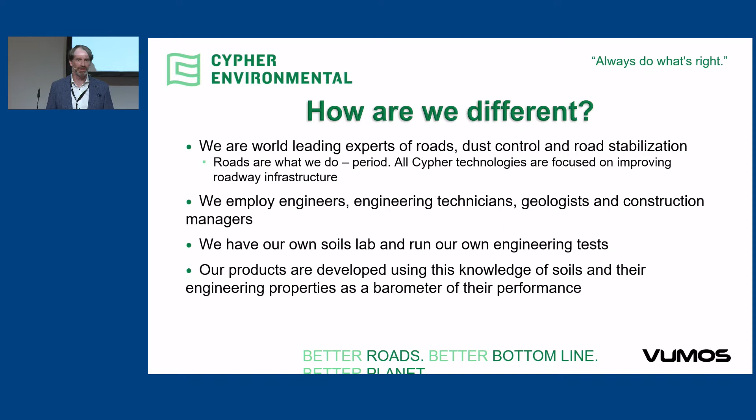We focus 100% on roadway infrastructure to make roads more sustainable and reduce the operating costs thereof. So we employ engineers, engineering technicians, construction foremen. When you're using one of our products, which I'll get to in a minute, we won't just give you instructions on how to use it. We'll actually send someone to your site to train you and work with you and hold your hand to make sure you get the highest level of ROI on our technologies.

So we have our own soils testing lab. Like I said, we understand roads and the materials that go into them. We use the lab not only as a barometer in terms of developing new products, but also as part of our QA, QC process as we're testing random batch samples of the products that we produce and ship to you.

So really quickly before I get into the products, just a quick slide on our core values. We wanted to give back a lot more to our clients beyond just making them more sustainable through the use of our technologies. So we developed a program called Cypher Green Roads. When we work with any mining client, or any client around the world for that matter, we are multi-sectoral in that we serve mines, oil and gas, forestry.

We do secondary roads for government. We donate up to 5% of the project value to the local community in the form of the product. So the same product that's making the mine more sustainable will now make the community next to the mine more sustainable as well. It's sharing of best practices between the mine and the community. It's really elevating CSR, or corporate social responsibility. It provides that social license to operate that some mining clients have a challenge with, and it really focuses on that community engagement piece.

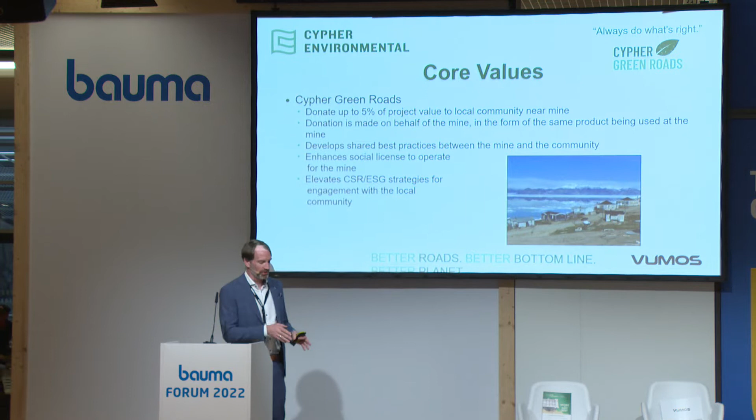Now, this picture here is Pond Inlet. We actually provided all the dust control for Pond Inlet for free. It's near one of our larger Canadian mining clients called Baffinland. They're at the top of Baffin Island, a very, very remote mine. We have the contract to do a 104-kilometer access road of dust control for them, and as a result, we did all the dust control for free in the community. We also trained some community members on how to apply the product, introducing essential skill sets so they now know how to apply the products themselves.

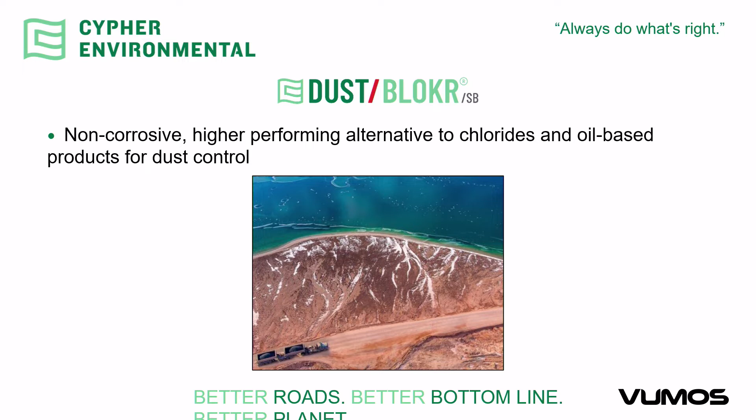Jumping into the actual products themselves, Dust Blokr Sugar Blend, the SB stands for Sugar Blend, is our 100% environmentally friendly alternative to products like magnesium and calcium chloride or hydrocarbon-based products for dust control. It's a much higher performing product with zero environmental impact, and that's actually one of the haul roads for Baffinland you see there. Like I mentioned in the first slide, you see how close it is to the ocean, so for them it was very critical to use a sustainable, environmentally friendly product.

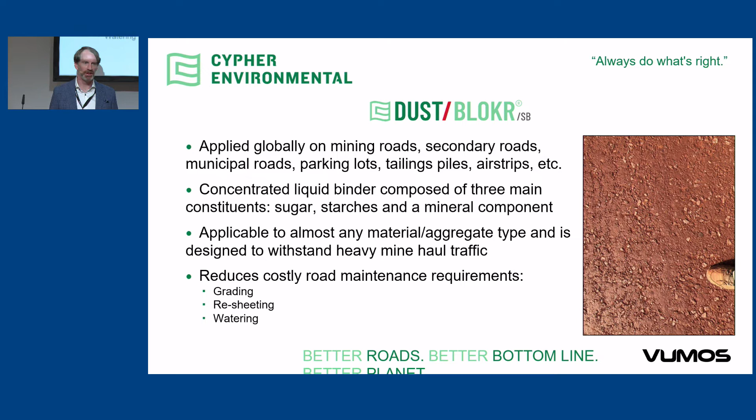The product itself is applied globally on haul roads, access roads. You can apply it to tailings piles as well to eliminate dust, wind erosion and water erosion from tailings piles. And airstrips, that's another big target for us. A lot of mines are in remote areas such as Baffinland, and we can do airstrips as well.

The product itself comes in a highly concentrated liquid form, so you mix it with water prior to application. It's composed of sugars, starches, and a mineral component, so environmentally friendly you could eat it. In fact, it's made of industrial grade versions of food grade products. With that being said, it won't attract wildlife though. That's an important piece to remember - it won't attract wildlife to the road.

But it's applicable to virtually any material type. Our team members will actually train you again on the right procedures based on different materials in terms of how to apply it and get the best results. I'm going to show a video later of a really challenging situation at a mine in Saudi Arabia with really challenging materials and show the effectiveness of the product.

I talked about it being higher performance than traditional dust suppressants, so it actually is going to reduce your OPEX - reduce grading frequency, reduce resheeting of your road. Remember, the dust cloud blowing away from your road is not just an unsightly hazard or an environmental issue, it's a piece of your road blowing away in the wind. The fines in that road that are blowing away is what's locking down the aggregates and the gravel. So once you lose the fines, you eventually lose the aggregates and need to resheet the road. This is a really good preventative way to maintain the road and reduce your operating costs.

And of course, it dramatically reduces watering. A lot of people still just use water for dust control. Most people think the water is free, but the fuel you burn 24 hours a day driving around spraying water on your road is extremely costly. So not only does it save fuel, but it reduces CO2 emissions. I'm going to show a stat later of how much water we've reduced for one of our mining clients.

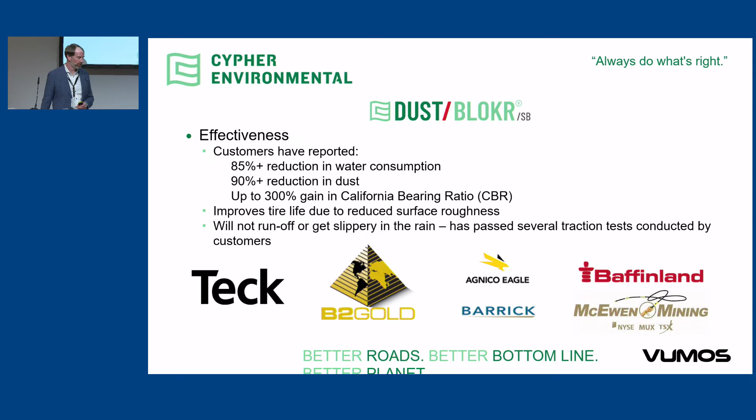I talked about it being higher performance and providing stability gains as a side effect. We did a research project in South Africa with ArcelorMittal where we mixed their slag with standard road building aggregates and did strength testing. We received over 300% gain in CBR, or California Bearing Ratio - it's an engineering term for soil strength. It also improves tire life because your roads are smoother.

It reduces wear and tear on your tires, so it improves tire life. It doesn't run off in the rain or get slippery. A major challenge for anyone who's used magnesium chloride, calcium chloride, or bischofita, as it's called in Spanish in South America, is that it's hygroscopic and gets slippery when it gets wet. Our product has zero issues with traction.

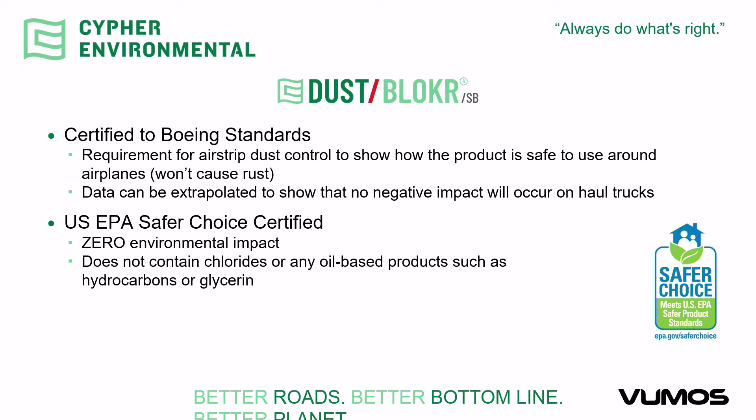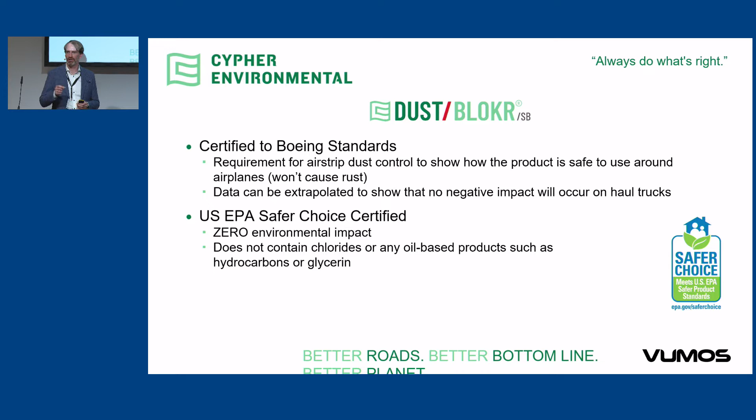It's certified to Boeing standards. You may wonder what that has to do with a mining presentation, but like I said before, we're approved to apply it on airstrips. We just got approval from Transport Canada. Why that's important, and another differentiator from salt-based products, is it proves it's fully non-corrosive and safe to use around airplanes. It won't cause negative impacts on paints, coatings, or moving parts of aircraft. That's critical in mining too, because it won't have any negative impact on your haul trucks, water trucks, or graders. It won't cause rust or any negative impact whatsoever. It won't run off the road, but if it splashes onto equipment while applying, it's very easy to wash off.

It's US EPA Safer Choice certified, which is another really critical differentiating factor. Essentially, the US EPA fully analyzed our supply chain and all of our raw materials, and we met all of their sustainability criteria, so you can use it even in the most environmentally sensitive areas.

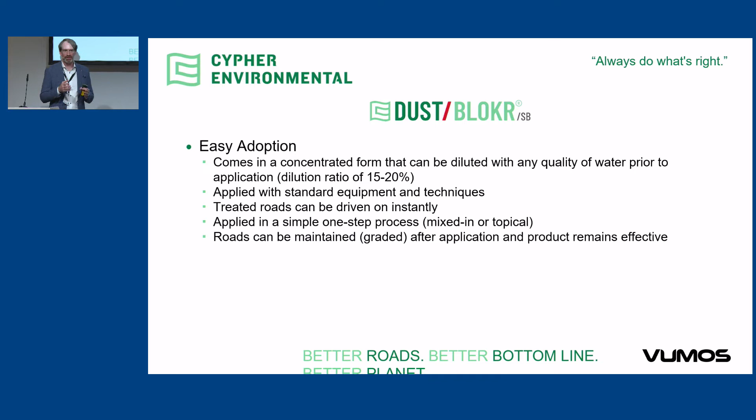Easy adoption. When we develop products, we really focus on easy adoption for our clients. It's critical that you don't need specialized equipment to apply them. You apply it with the same standard water trucks you'd use for water or any other product. As I mentioned, it comes in a concentrated form, with 15 to 20% dilution rates of product to water - so 15% product to 85% water, for example. Logistics costs are low to ship it to remote sites.

It can be stored outdoors, even in extremely cold temperatures. I mentioned Baffinland before, and a customer in Africa - both store the product outdoors. Baffinland is at about the 64th parallel, so extremely far north, with -50 temperatures in the wintertime, and it's freeze-thaw stable. In Africa, they have temperatures close to +50, and they're storing it outdoors there too with no issues. It's applied with standard techniques and standard equipment.

Treated roads can be driven on instantly - that's a really critical factor. Some products require substantial curing time before you can drive on the roads, but our roads can be driven on right away with no negative impact. In fact, traffic actually helps provide compaction on the road, benefiting the product further, since it also provides stability gains.

The next point is that it's applied topically or mixed in. If you just spray it on topically, you'll get great dust control results. But for longer-lasting results and greater stability, you can mix it into the top few inches of the road material, seeing greater stability gains - increases in CBR, even reductions in rolling resistance, which is the friction between the road and the tire, making haul trucks more fuel efficient. I'll talk more about that with our next product.

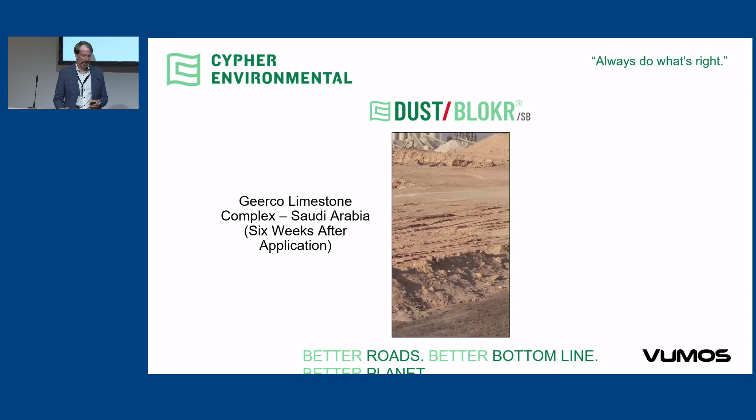Some people called us out saying the road still looked wet, so we posted this video of the same road 6 weeks later, with clearly no rain. It's in the Saudi Arabian desert, an extremely dry environment, and you see the road is very hard and stable. They should have pointed the camera the other direction, but I can assure you there's no dust behind that vehicle. Customers really like that because of the sugars and starches, the product has a rich pigment, so there's a lot of color and people can see where the roads have been treated. You can see it's a very stable, hard, smooth running surface with a huge positive impact on that road.

Jumping to the next product, road stabilizer. This product is specifically designed as a stabilization aid for high clay content materials, which are normally marginal in terms of engineering properties, because when clay gets wet it swells and loses all of its strength, producing a lot of downtime on haul roads. This product provides a much higher performing road in both wet and dry weather.

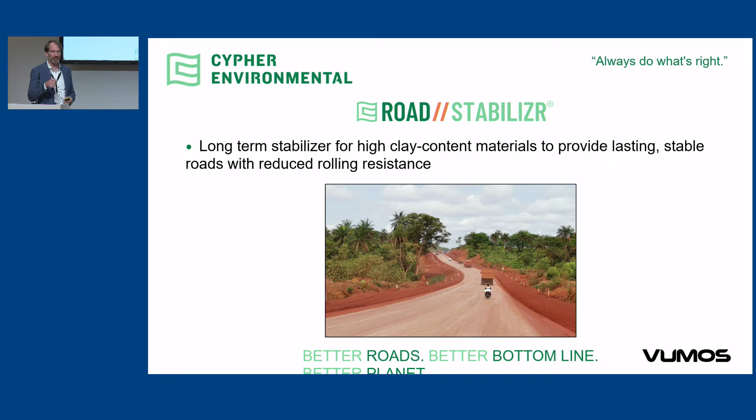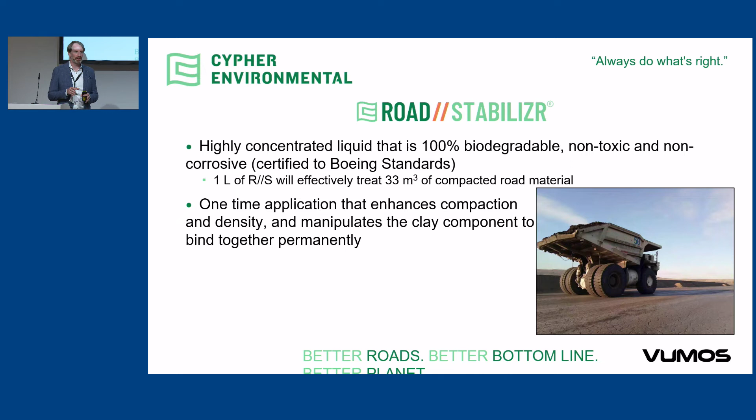I think the most unique property of road stabilizer is how concentrated it is. I talked about dust blocker being concentrated - road stabilizer treats roads at a rate of 1 liter per 33 cubic meters of compacted road material, so it's unrivaled in terms of logistics savings and product cost per mile or per kilometer of treated road.

The other very unique property is that one application is permanent - it lasts for years. If you come by our booth, B5420, you'll see a picture of an actual road that was stabilized only one time and was 7 years old. We used a diamond tip saw to cut a piece of that road out with no further applications of the product, so you can see how dense the product is and what the end product will look like.

That one application lasting for years is extremely unique, and this product is also certified to Boeing standards, so no negative impact on your haul trucks, water trucks, graders, or anything else.

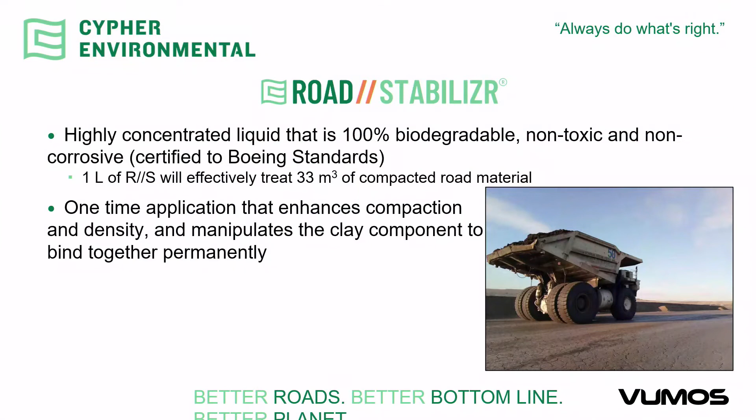This is the Shenhua mine pictured here, a coal mine in China. I'm going to show a really cool stat later on of how much fuel they saved after stabilizing their roads as a result of reducing rolling resistance. It's used to treat the wearing course normally of haul roads.

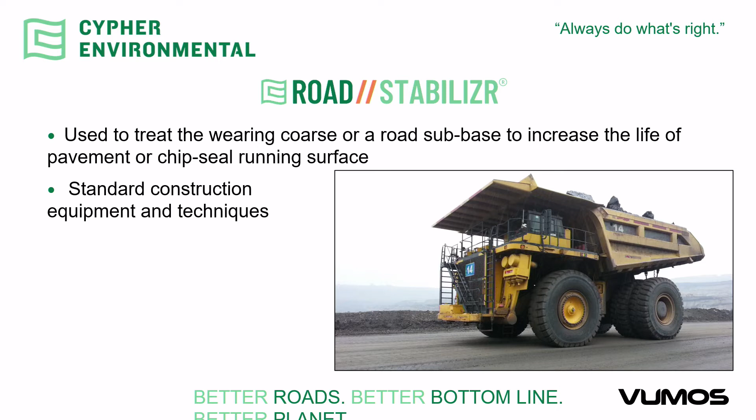We are multi-sectoral in terms of building roads for numerous sectors, so you can also put it in the sub-base or subgrade underneath pavement or underneath chip seal. You can actually increase the modulus of elasticity, and so potentially reduce the thickness of the pavement or increase the lifespan of the pavement. But again, standard construction techniques and equipment are used, so easy adoption of this technology as well. You don't need specialized equipment whatsoever.

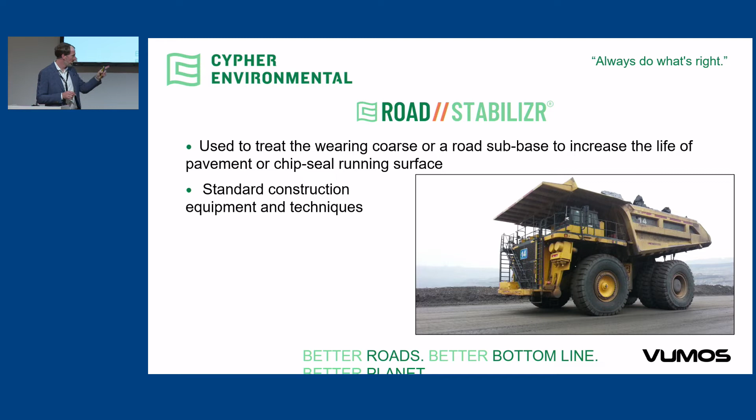Again, this is actually the Shenhua coal mine as well. You'll actually see, if you look closely, it's actually raining in this picture. They had about 90% passing the number 200 sieve, which means it's 90% fines, or 90% clay and silts, so a very, very poor road building material. You'll see very minimal impact, if anything, behind the tire tracks of the vehicle there during the rain.

So how the product works: clay essentially has an opposite charge to water. That's why in the presence of water, it always swells. So we introduce a receptor - clay has a receptor that attracts that water molecule, and we fill that receptor on the clay platelet so it no longer is attracted to that water.

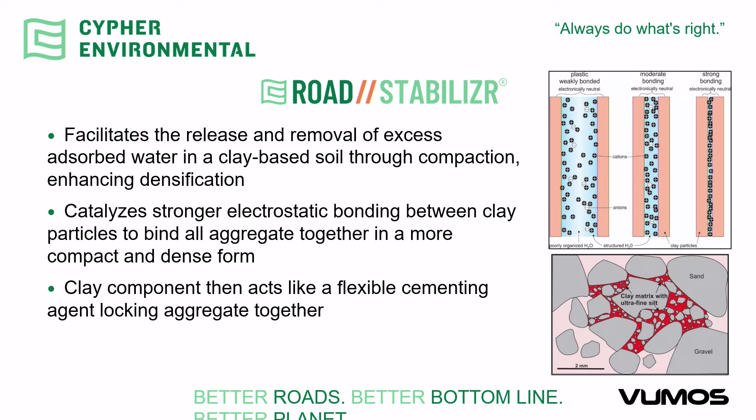During the compaction process, and you have to compact roads when you're building it, you can't just spray it on and leave it. Mixing in and compacting is necessary when you're building roads with road stabilizer. But during the compaction process, because we fill that receptor, we push more water out, providing increases in density.

There's wetting agents in the product as well, so they're like surfactants. They reduce the surface tension of the water held within the soil matrix during the compaction process. By reducing that surface tension, we can further push more water out, further increasing density, and we have some catalytic reaction that takes place, or catalysts, that provide electrostatic bonding between the clay platelets. So essentially, we're cementing everything together with the clay - the clay is binding everything together.

So that's why it's really important to understand what's in the road material before you treat it. We actually go as far as not even selling you a product, at least the road stabilizer product, until we know that your roads and your materials are suitable for treatment with road stabilizer. So we want to see the results of a soil analysis.

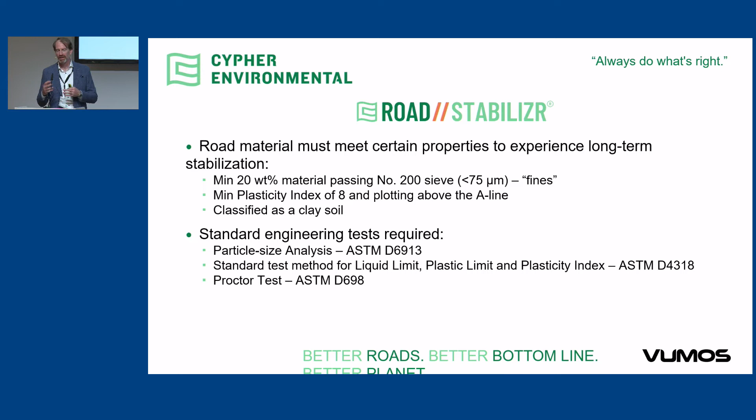This is a standard soil analysis you can do anywhere in the world. Of course, we can do it for our customers in Canada - sometimes there's challenges in shipping soils across borders. But what we're looking for is a minimum of 20% passing the number 200, or 75 micron, sieve, and plotting above the A line on the Casagrande chart.

Apologies if anyone's not an engineer in the room. I'm actually not an engineer either. I can tend to talk like one, but I'm not. I don't have one of those rings on my pinky finger.

But when I say plotting above the A line on the Casagrande chart, the materials above the A line are C-based soils, or clay-based soils, so we know they're going to have the cohesive properties that we want of clay. Something plotting below that is an M-based or silt-based soil, so it's not going to have the cohesive properties that we want, and therefore wouldn't be suitable for treatment.

Now, we designed the technologies to be compatible with each other and synergistic with each other. So if you don't quite have the right properties for long-term stabilization with road stabilizer, we're actually doing a lot of projects where we mix both products together, and you still get long-term stability through the added binding you get through the sugar blender for the dust blocker product in combination with road stabilizer.

So a standard particle size analysis and Atterberg's limit test is really all that you need to see. A Proctor test is very important. For those of you who don't know what a Proctor test is, it creates a bell curve.

It shows you what the optimum moisture content is to compact the road at, so that when you compact it at optimum moisture content, you reach maximum dry density. Anecdotally, 98% is typically the target when building roads in terms of density or compaction. The highest I've ever seen is 108.8% density, which is unheard of since it's rare to get over 100. Of course, we have all this available in third-party lab results.

In terms of benefits, it's all about increasing the engineering properties of the treated materials: increasing CBR, or California Bearing Ratio, increasing density like I just talked about, reducing permeability, and reducing swell. So in the presence of water or in the rainy season, it's not going to swell, and you're going to have much higher performing roads in wet weather.

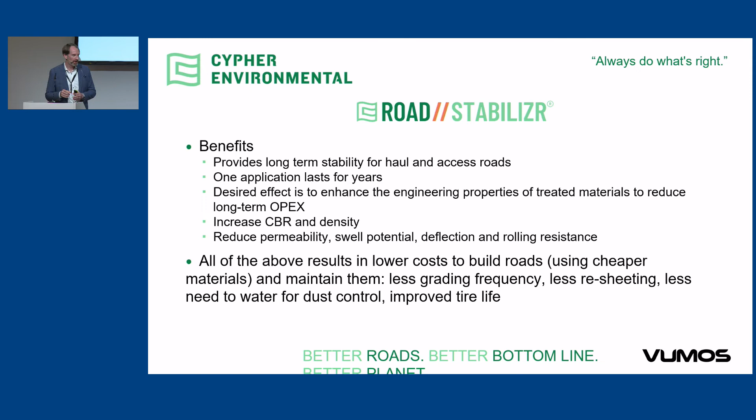And reducing deflection. Deflection is when your haul truck is moving over a road, the road actually moves a little bit. If the CBR or density is a little low, the road will move more, creating more contact between the road and tire, and therefore more friction. When we reduce that movement and improve the surface roughness of the road, we reduce rolling resistance, so less energy is required to go from point A to point B. Your haul trucks become more productive and more fuel efficient.

So the whole philosophy here is to build lower cost roads because you're using cheaper materials, like high clay content materials, which are abundant in a lot of parts of the world, while aggregates are becoming more and more depleted everywhere. So you can use lower cost materials to build your roads and substantially reduce your OPEX.

In terms of reduced grading frequency, you're also going to reduce dust control requirements as a side effect with this product. That's why I talked about the products being really complementary of each other. You're going to reduce your watering frequency as well, even though dust control isn't the primary target of road stabilizer—dust blocker is.

Ultimately, lower cost roads to build and substantially lower cost roads to maintain. And of course, less resheeting requirements as well. Remember, one application lasts for years, so you're not needing to resheet the road over and over again, which saves a huge amount on material costs when you're building the roads.

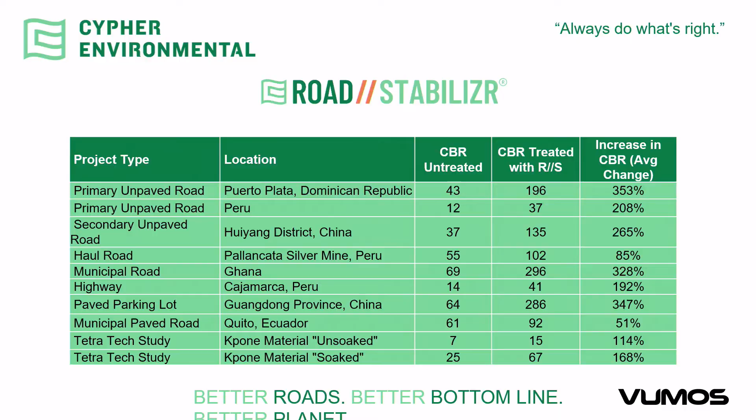Again, several different examples here of CBR gains - California bearing ratio. For the newcomers, I see people filtering into the seats. CBR is an engineering term for soil strength. If you apply the product correctly, you're always going to see a gain in CBR. You may wonder why at the top there, for example, you see a 353% gain in CBR, while the lowest one is 51%.

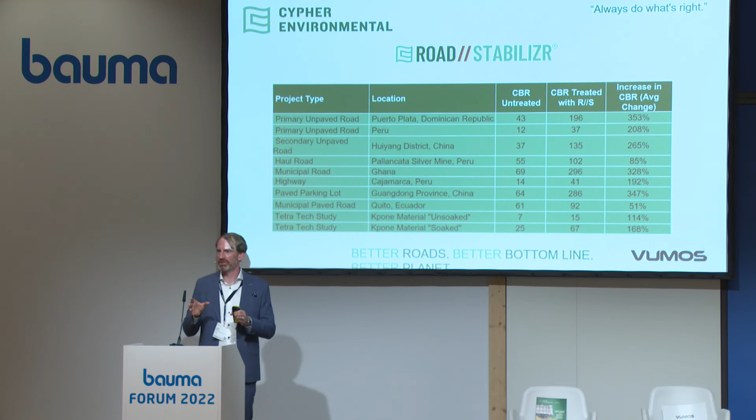There's different types of clays. Montmorillonite is much more active versus illite or kaolinite, which are a little less reactive to water. There's different percentages of silt to clay ratios and different gradations of materials. Ultimately, your CBR will always gain if you apply the product at OMC and compact it properly.

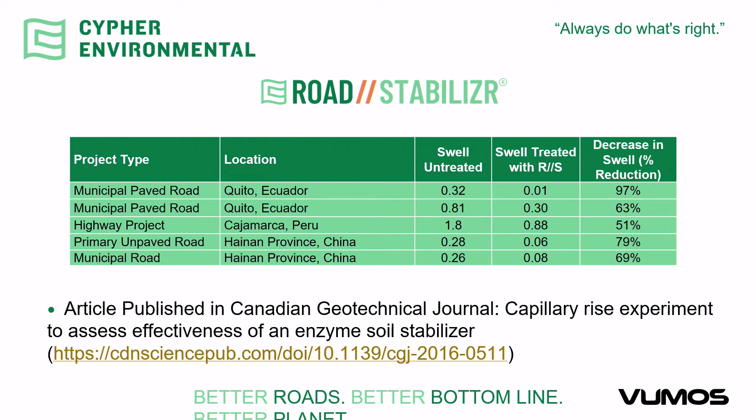In my opinion, though, reducing swell is even more important, because for those of you in countries with a rainy season, when your roads built with clay get wet and swell, you lose all the strength. That's when you have a lot of downtime and increased OPEX, because you have to maintain the roads or even shut them down during the rainy season or in wet weather.

So this is almost essentially like saying you're maintaining up to 97% of your dry strength when wet, for example. I mean, that's sort of a roundabout way of saying it. But as you can see here, there's a huge substantial reduction in swell potential.

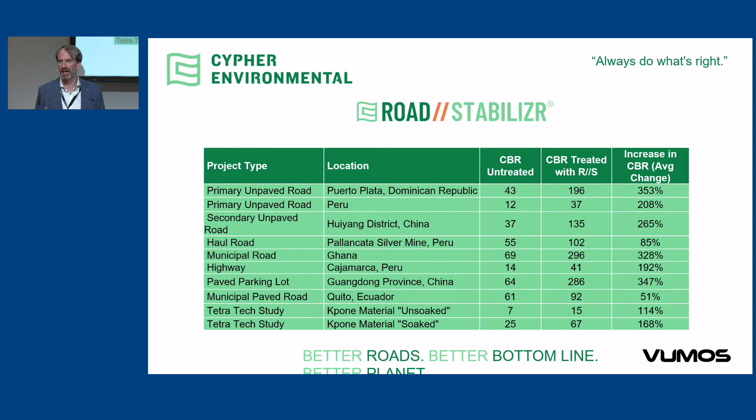In fact, if I go back to this slide, you see the bottom one is a soaked CBR. That's from Ghana - it's a Tetra Tech study - showing a 168% gain in soaked CBR, so doing a California bearing ratio test when wet.

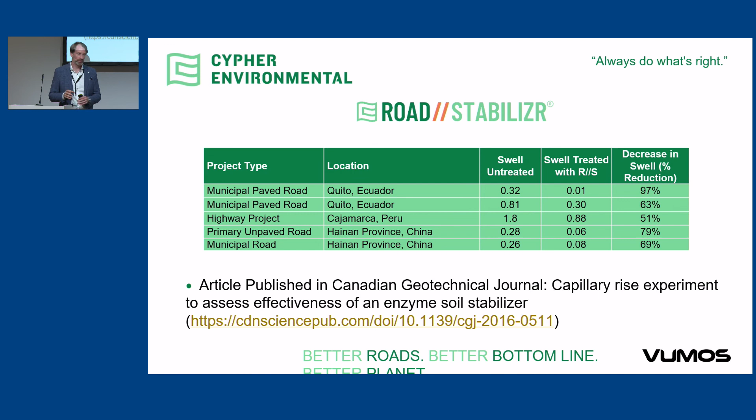We actually have a 2-year study published in the Canadian Geotechnical Journal about reducing capillary rise - that's water being sucked up and taken from below the road. That's what's causing a lot of your major subgrade failures, potholes, all the issues on your roads from below. So we did a 2-year study, basically compacted soil columns, soaked them in water, and measured the water uptake. We dramatically reduced the uptake, and it's published in the Canadian Geotechnical Journal. There's the link, but we can also share it with you.